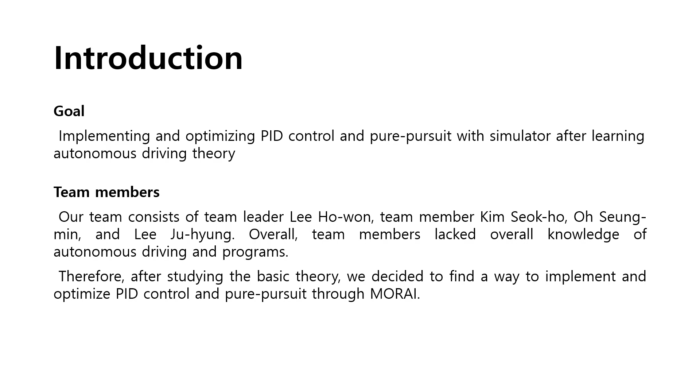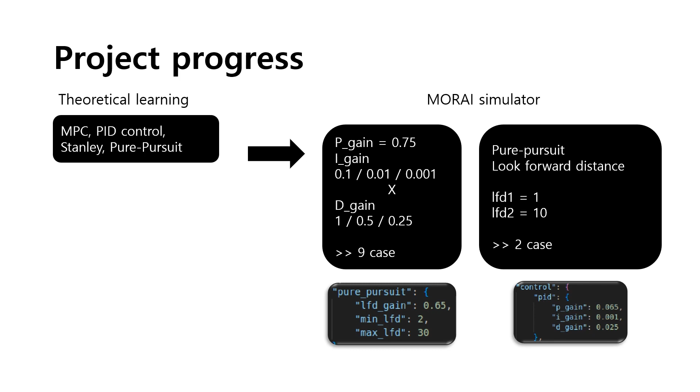Over the entire course of the project, our team implemented the learned theory in Morai by adjusting the coefficients of the PID and pure pursuit controls. We derived the most stable values. MPC is Model Predictive Control, a control algorithm that solves optimization problems by modeling systems and predicting future behavior. This allows you to take into account the state of the system to determine the optimal control input and achieve your desired goals.

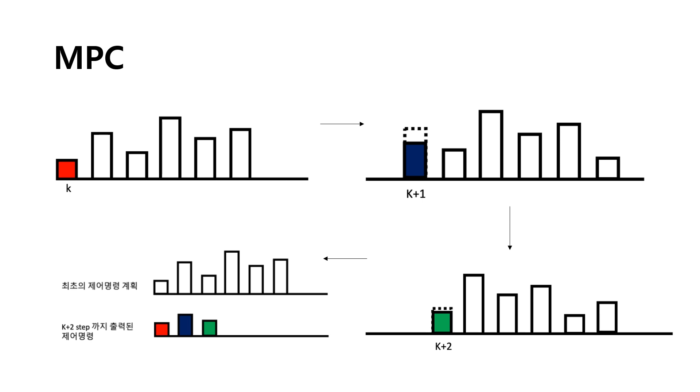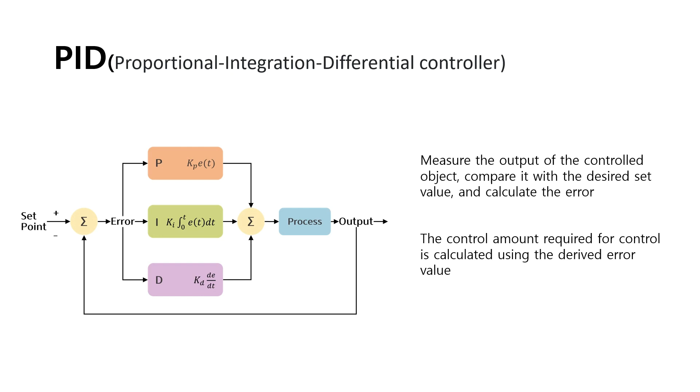PID control stands for Proportional Integral Derivative Control. Measure the output of the control target and calculate the error by comparing it to the desired setting value. It calculates the amount of adjustment required for control based on the error value. PID control consists of three components. The P term adjusts the control input relative to the error. The larger the error, the greater the amount of change in the control input, which helps to reduce the error quickly. However, with only proportional control, the error does not converge to zero, and the system may not be stable.

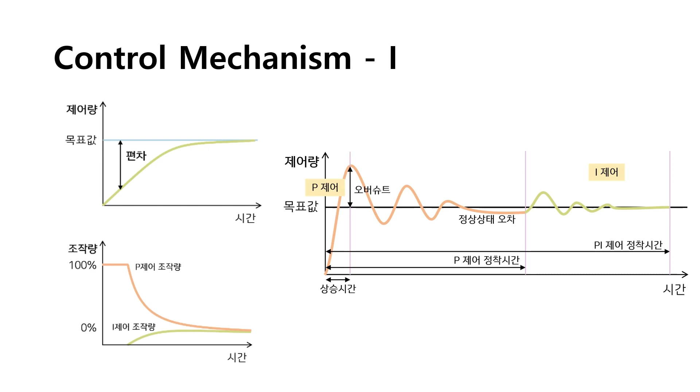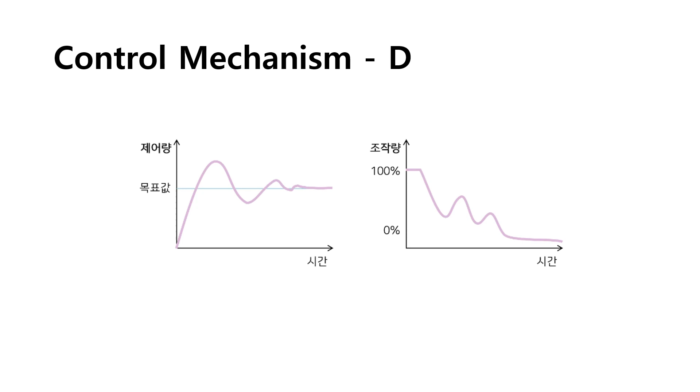The I term adjusts the control input by integrating the cumulative value of the error. This helps to stabilize the system if the error occurs for a long time. Integral control produces a control input proportional to the sum of the errors. So even if the error is zero, a constant control input can be maintained. The D term adjusts the control input in proportion to the rate of change in the error. This improves the response rate of the system by detecting the rate of change in error, predicting future error trends, and adjusting control inputs. Differential control can reduce overshooting or vibration.

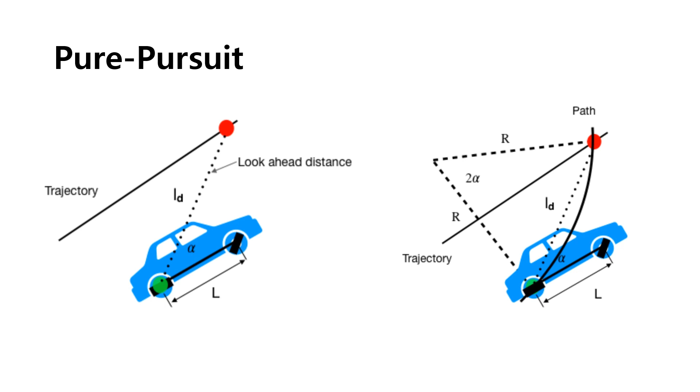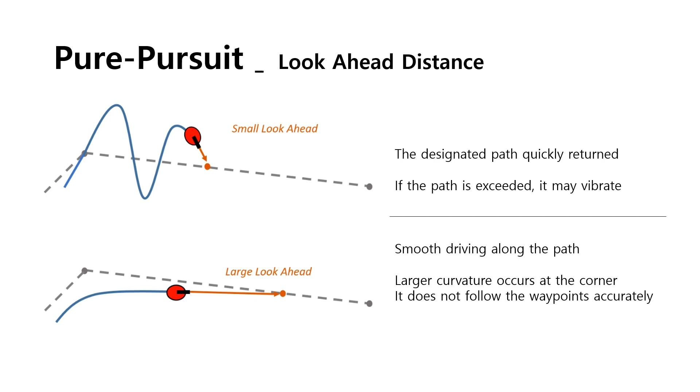Pure pursuit is a path-following algorithm used by robots or autonomous vehicles to track and reach their target points. The algorithm is based on the current and target positions of the robot or vehicle and determines the next target point to generate a control input. The pure pursuit algorithm is a path-following algorithm that runs fast and smoothly along the path. Exceeding paths can cause vibration, and large curvature in corners can cause difficulty in tracking the path accurately. It may not follow the target path exactly, but it is mainly used for smooth driving.

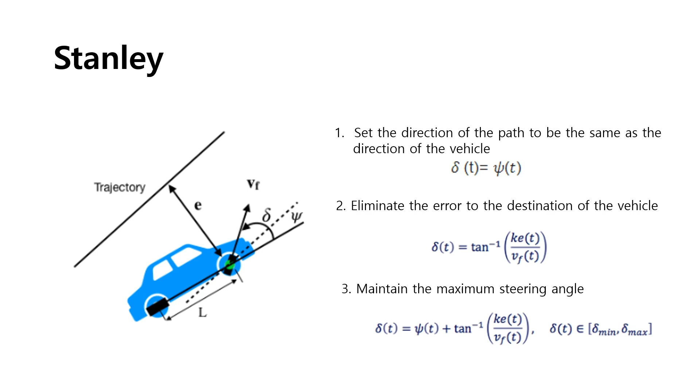The Stanley method uses the curvature of the lane you want to follow and the lateral error to control the steering angle of the vehicle. Plan our journey based on information. Apply the control algorithm pure pursuit to track your target point and drive safely. Pure pursuit is a path-following algorithm that tracks paths along target points. Stanley extends pure pursuit to follow the route, bringing it closer to the route and minimizing errors.

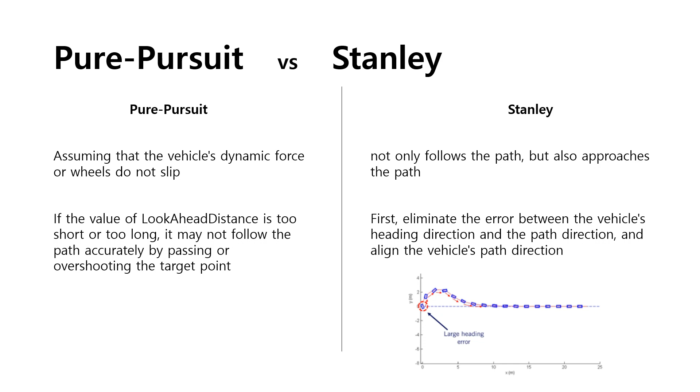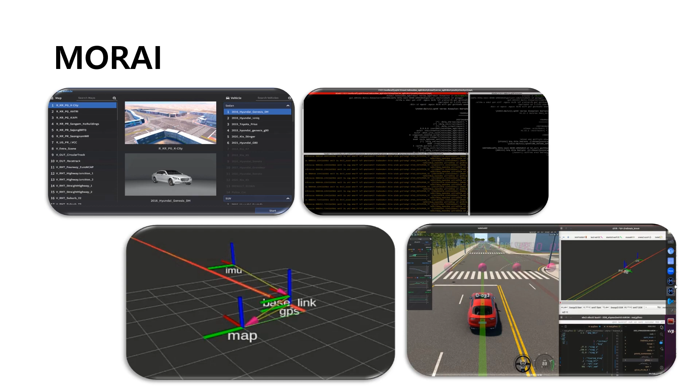We're using the Morai Simulator. You can choose the route and type of vehicle, and you can implement autonomous driving through the code after connecting to ROS communication. It took a lot of time because the setting process for executing Morai was complicated.

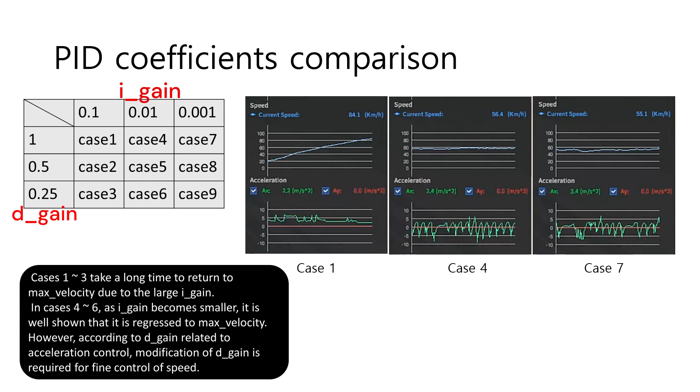The following is a total of 9 cases, and the speed and acceleration data of 3 unstable cases. As mentioned earlier, these are cases in which the I gain and D gain values have been changed. If you look at the graph, it looks quite unstable. This is a test video. All 3 cases show unstable appearance.

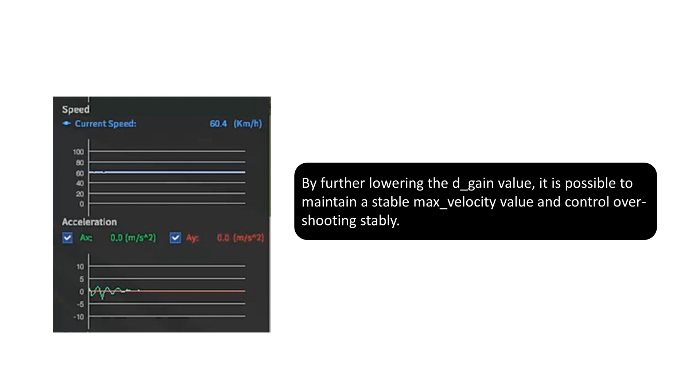The following are the most stable driving cases among the 9 cases. By further lowering the D gain value, it is possible to maintain a stable max velocity value and control overshooting stably. This is a test video. It shows much more stable driving than other cases.

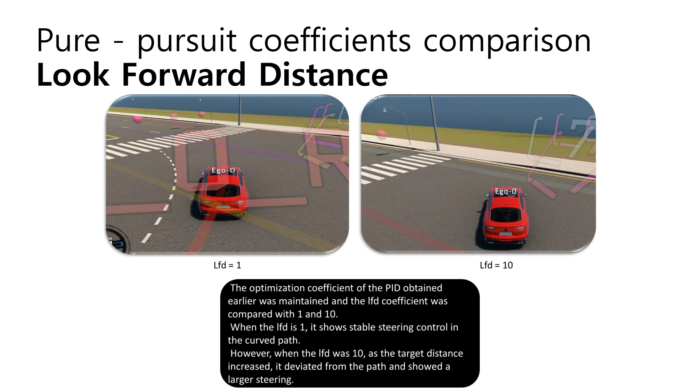In the PID settings of the 9 cases, the LFD coefficient was compared with 1 and 10. When the LFD is 1, it shows stable steering control in the curved path. However, when the LFD was 10, as the target distance increased, it deviated from the path and showed larger steering. This is a test video. Through the test, we were able to confirm the theory we learned.

Here are the feedback and future plans. Our team wants to study autonomous driving more deeply with the following feedback and plans.